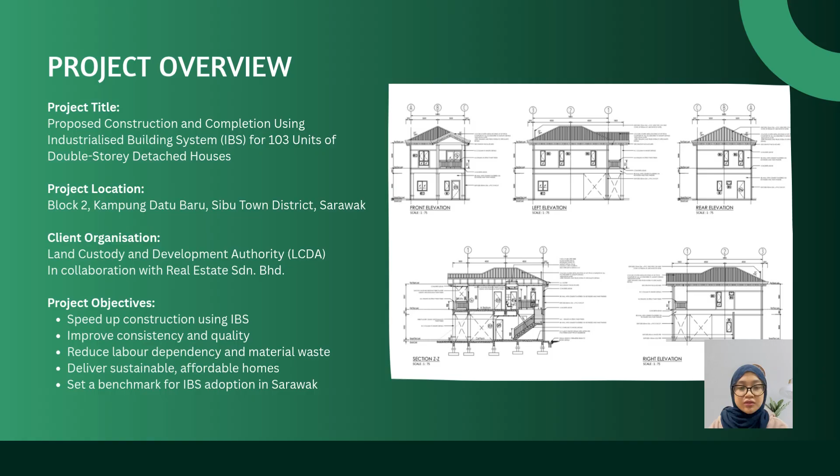This project brings together several key professionals: LCDA and Real Estate Sdn Berhad as the main client and project drivers, FV and Amanda Lau as the architects responsible for design and layout, and the consultant provided civil and structural engineering services. Perunding Kenyit managed the mechanical and electrical works. Juru Ukur Bahan CWC acted as the quantity surveyor, handling budgeting and cost control.

This multidisciplinary team worked closely from planning to completion to ensure the project meets safety standards, design goals, and financial targets. The site is in an accessible urban location, but Sarawak's frequent rain poses risks to construction progress. By using IBS, the team reduced weather delays through off-site precasting and on-site assembly. The double-story design maximized space with living areas downstairs and bedrooms upstairs, balancing function and comfort.

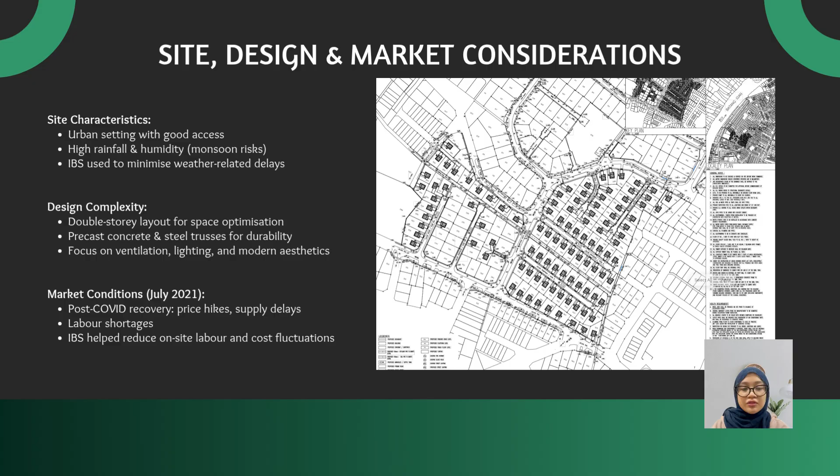At the time of tender in July 2021, the industry faced COVID-19 impacts, rising material costs, supply chain issues, and labor shortage. IBS helped address this by limiting on-site work and improving cost and schedule control. Overall, the project demonstrates smart adaptation to market and environmental challenges using modern construction methods.

Assalamualaikum sir. So for my part, I will be explaining the Form 1 of the ECA form. The job title for this project is Proposed Construction and Completions Using Industrialized Building System for 103 units of double-story detached houses on Block 2, Sibu Town District at Kampung Datu Baru, Sibu, Sarawak. So the location is Sibu, Sarawak.

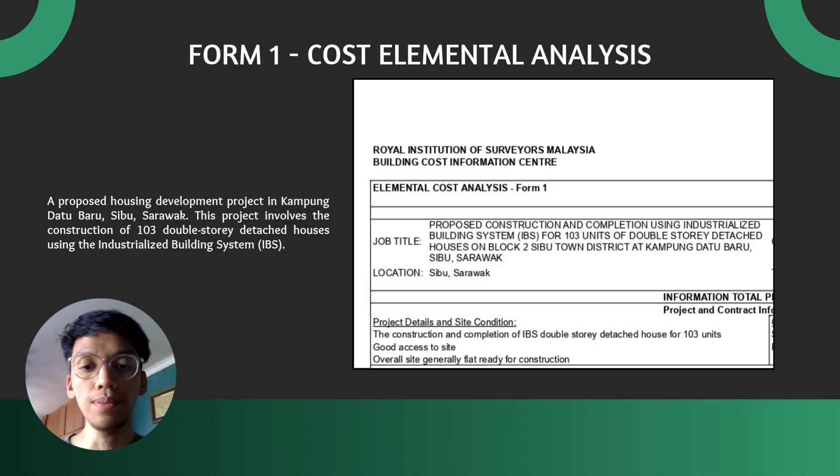For the information on the project details and site conditions, it is the construction and completion of IBS double-story detached houses for 103 units. There is very good access to site, and overall the site is generally flat and ready for construction. The building type and code for this project is number 8, which is residential building. Below this is the houses of the project, which is A-2-150. It should have been 122, but maybe there's a technical issue on the Excel.

So A is the material used for the frame, which is reinforced concrete. 2 is the number of stories for the building, which is a 2-story detached house, and 150, supposed to be 122, is the GFA of the house.

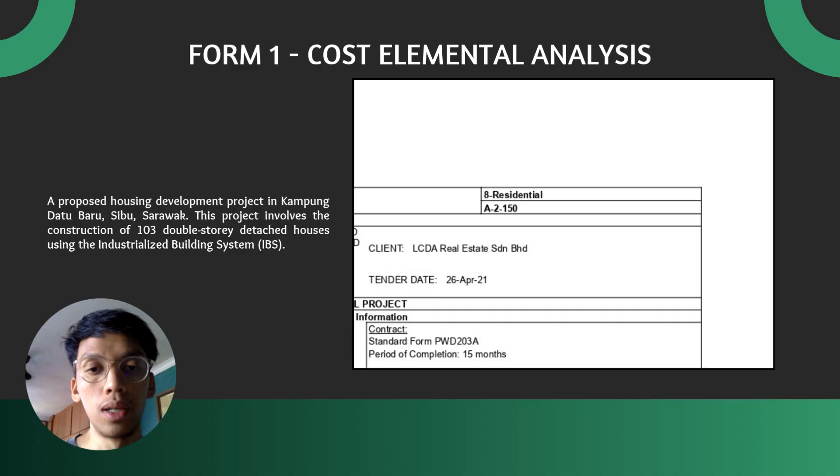Moving on to the contract particulars for this project. They use PWD 203A, and the tender used bill of quantities, negotiated. The number of tenders issued by the client is 5, but they received only 4. This is the competitive tender list. The first one is 22.7, the second one is 22.8, and the third one is 23.5 million. The contractor for this project won at 21.4 million.

Okay, so for the design and shape information, since this is a detached house, it has a living room, dining area, kitchen, 3 bedrooms, 2 bathrooms and others. The ground floor area for this house is 61.19 square meters. The first floor is 60.32, with a total of 122 for the gross floor area. If we count the usable area, which is 104 square meters, and the circulation area of 17 square meters, that also comes to a total of 122 square meters.

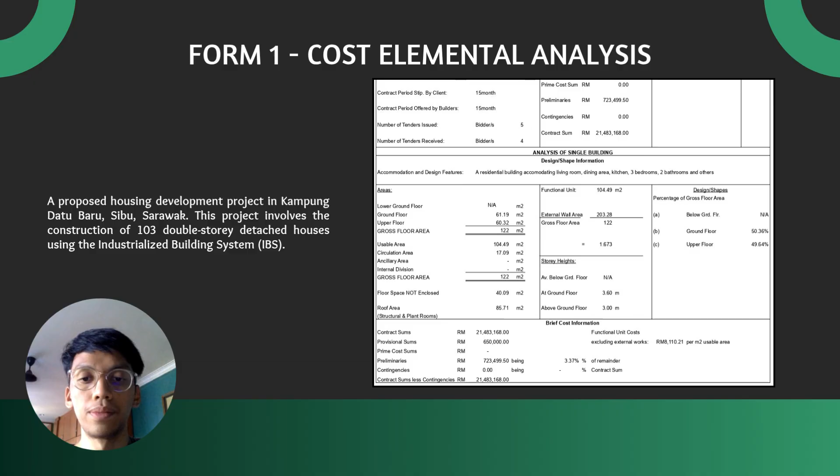Hello everyone, today I will briefly present the elemental cost analysis Form 2 for a proposed housing development project in Kampung Datu Baru, Sibu, Sarawak. This project involved the construction of 103 double-story detached houses using the Industrialized Building System (IBS). Each house has a gross floor area of 122 square meters with a contract sum of 21.48 million. Let's look at how this cost is distributed by building elements.

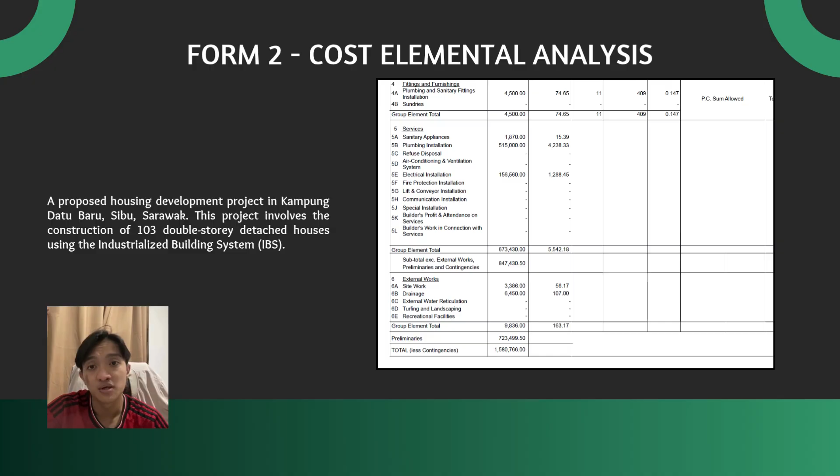First, the substructure includes piling and groundworks totaling 42,000 ringgit Malaysia or about 708 ringgit Malaysia per square meter. Second, the superstructure is the largest cost segment at 87,000 ringgit Malaysia, accounting for key components like frame, floors, walls, windows and doors. Next, we have finishes including wall plastering, floor screeds and ceiling treatments, totaling 38,000 ringgit Malaysia or RM646 per square meter. For fittings and furnishing, mainly plumbing and sanitary items, the cost is 4,500 ringgit Malaysia, a relatively small portion.

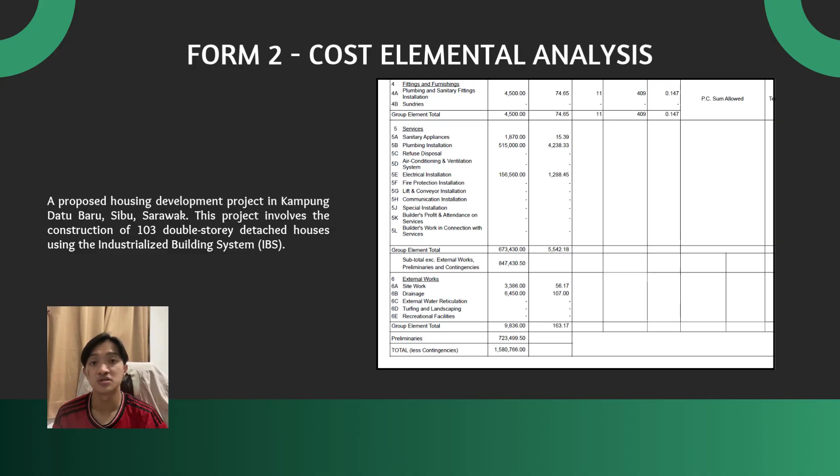The services section is significant with plumbing and electrical installation contributing a combined RM673,000, representing over 5,000 ringgit Malaysia per square meter, largely due to M&E systems. Additionally, external works like drainage and site preparation cost 9,000 ringgit Malaysia and preliminary general construction overhead at 700,000 ringgit Malaysia. In total, the unit cost per usable square meter is approximately 8,000 ringgit Malaysia, which is useful for benchmarking against other projects. In conclusion, the superstructure and services dominate the cost, highlighting the impact of structural system and M&E services in modern IBS-based housing.

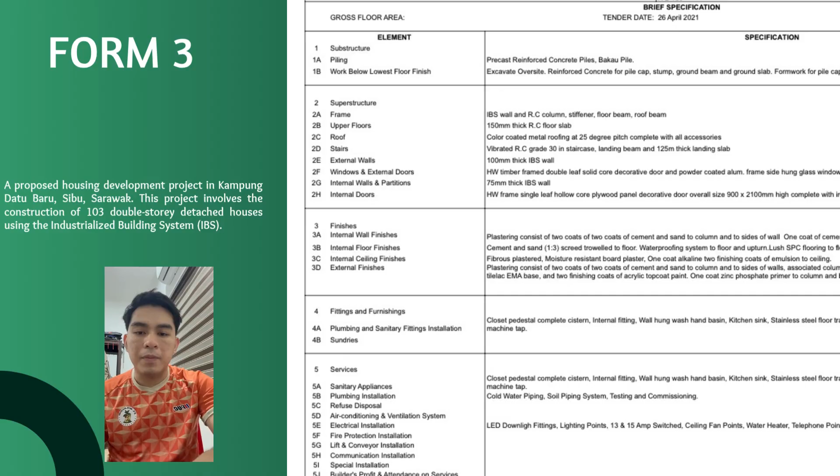Okay, now we will move to Form 3, which is basically the last form for the ECA. Form 3 doesn't involve any calculation, unlike Form 1 and Form 2. Form 3 basically states the specification for each element of the proposed building. Form 3 is divided into two columns. The first column is the element of the structure, and the second column states the specification of the elements. This specification can be obtained from the drawings and the BQ.

Hello, my name is Nur Christina and I am here to conclude our presentation. This elemental cost analysis has helped us better understand how construction costs are organized and managed in a real project. For this report, we analyzed the proposed construction of 103 double-story detached houses in Sibu, Sarawak using the RISM standard format. We broke down the cost of each element, including the structure, finishes, services, and fittings, and learned how each one affects the total project cost.

The use of industrialized building systems, or IBS, also showed us how modern construction methods can help reduce site labor, minimize delays, and improve cost efficiency. This type of analysis is very helpful for clients, especially when there are budget limits, because it shows where adjustments can be made without affecting the overall quality of the project. Overall, this task gave us practical skills in cost planning and helped us see the important roles of quantity surveyors in giving advice, managing expenses, and supporting better decision making on real construction projects.